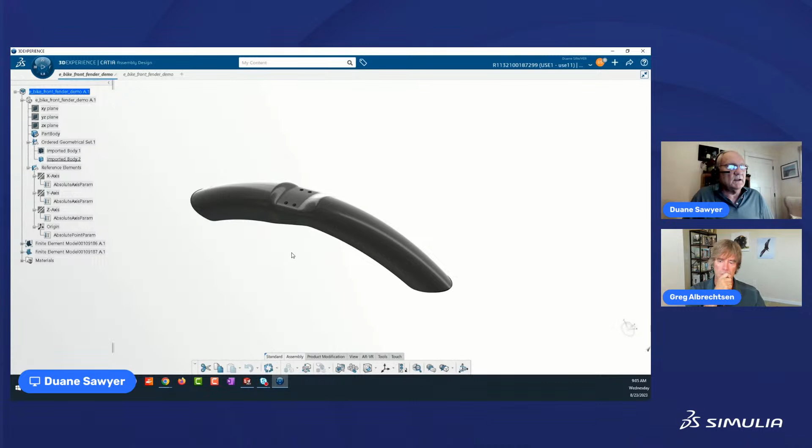From a plastic part design, you're looking for something that has uniform wall thickness, that's always a necessity. In the case of this part, the chances are very good that the plastic goes into the part into what we call a gate. So you probably want to place the gate in an area like this because it's going to be hidden, won't be shown. A gate is just the entry point for the plastic to go into the mold. So that's where you would shoot it in, essentially.

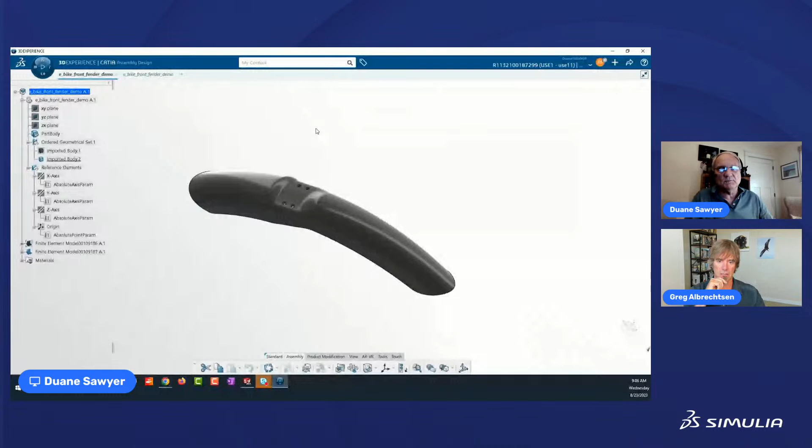Yeah, so it's called injection molding, and the plastic is melted and then injected into the mold. The mold itself is kind of the negative volume of what the part is, it's the absence of the part encased in a piece of steel. So that is the mold, and you inject the plastic into it, and then all sorts of things happen.

The advantage to having software do this for you is that in the past you would go by experience, or if it's the first time, you're in for a surprise. You put the plastic in there, and if it doesn't come out the way you expected, it could be for a number of reasons: the way it's processed, the amount of pressure behind the plastic stream going in, or when it cools down it warps because of the geometric construction, or it could just be the processing parameters.

So the software gives you the ability to predict what your end result is going to be. That's kind of our whole mantra - the whole mod-sim idea: simulate it before you have to build it. Reduce all that testing and prototyping - just do everything on the computer. You can do hundreds or thousands of iterations, and even if you don't get it exactly right in software, if you get it close, you go through a lot of the rudimentary things, and hopefully just build one mold at the end instead of several.

For a part like this, it's a relatively simple part. It's going to have a curved parting line on it, and some complexities in mold making. But if you were to make one cavity for this, I don't know what it might cost - it might cost $20,000 to $30,000, just for a single cavity. You could probably make it cheaper out of aluminum or something, but then it won't last as long.

If you are doing something pretty complex and multi-cavity - odd as it may seem, some of these small closures like on a water bottle - they make a very large cavitation mold, like 125 cavities, with a lot of parts in there, and you could easily spend over $1 million for a mold. So it really makes it important to know what you're doing before you invest all that money, because of the repair or modifications that might have to be done, especially for a multi-cavity mold.

So the process is typically you prototype it in a single cavity, and then you might go to a pre-production type of mold just to make sure you're thinking correctly. Once you've got everything lined out, then you go ahead with manufacturing the full production mold with multi-cavity. Well, let's see how we do this fender.

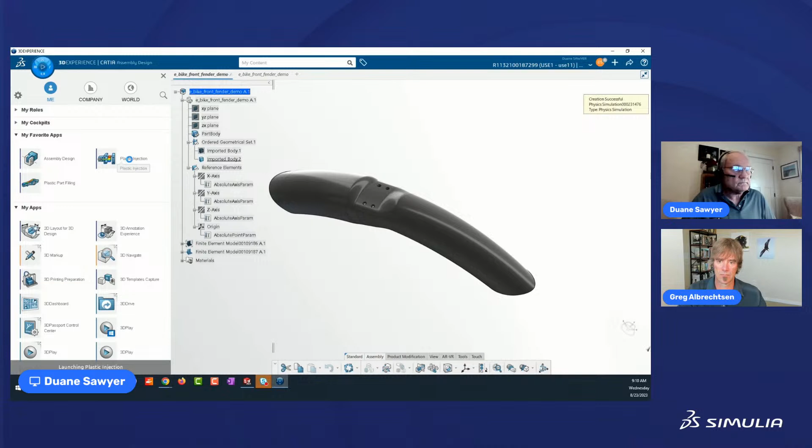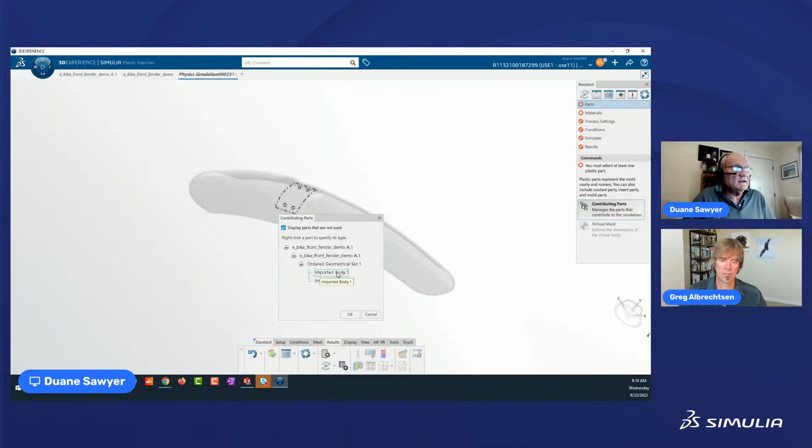The next thing we do is just go up to our compass and select the plastic injection molding app. This pops up with a window that allows you to step through the process. The first thing you see is the parts, and under this you've got contributing parts - there's only one in this case. But if you click on that, you end up with a tree, and we've got this part that we can say, okay, this is my plastic part. That's as hard as it gets right there.

If you've got multiple things you're considering, such as cooling lines and runner systems and that kind of stuff, it allows you to assign those domains to those different components.

And you see the green check mark over here. I had opened this up before, so I had a material in here from before. But if I were to go into here, it brings up a palette of materials that comes with the software, and then I get this little thing here. We'll close our eyes while you enter that.

So while you enter that in, you said the materials come with the software. So we get like a default handful of materials? If you call 4,000 a handful, yeah, that's two handfuls.

The material that we use, you just can't go make it up. It's characterized as being a non-Newtonian material, so you need to understand the reaction of pressure and temperature on the flow of the plastic. These materials we have here have all been characterized with that data, and it goes into a material file.

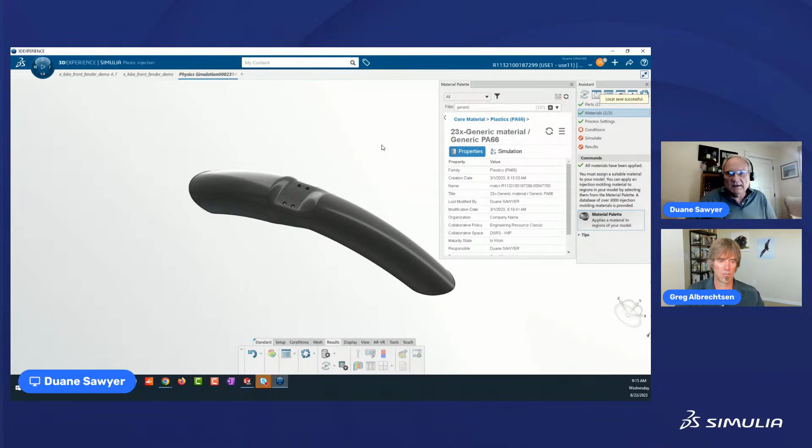You can have individual files that you could import as well, but this way everything's there, so you can choose whatever you want to do.

Notice the green check mark is there, so I'll go on to this next one, which also has a green check mark. That's just because I visited it before. But you see this area where they're in gray. These are the material properties that come in from the material I selected.

So it's giving me melt temperature, mold temperature, the ejection temperature - that's the prediction of the manufacturer saying this is the earliest temperature where you should or can eject a part from the mold, before it cools down to room temperature. Because in injection molding, cycle time is money - the faster, the better.

So they got to get something else in there - the faster you can make it, the more money you make. You may or may not have somebody sitting next to the machine operating it, but that machine costs millions of dollars.

So you break that down to what's the cost of the hourly rate, all the way down to the seconds, so you know how much that's costing you per second. So these can be edited, though it's typically not advisable unless you really want to do that and need to know how.

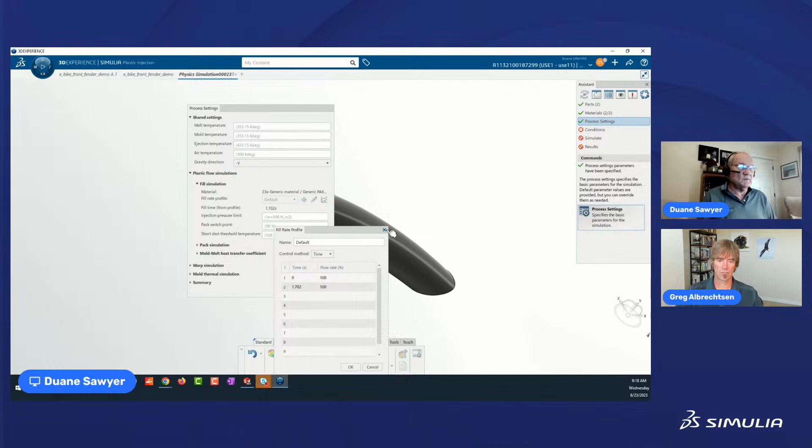So the next thing you look at - we're really kind of setting up a virtual machine here. We've got the mold sitting in a machine, and it's already calculated for you what the fill time should be. If you want to change some of those, you can set up a profile as to what happens when, what's the percentage of the flow rate, or by pressure. There's a number of things you can do, but again, you can just accept this as a default.

The switchover point from filling to packing is a default of 98%. Industry standards run anywhere from 90, 92, 94% up to 100%, but this is typically a well-accepted number, the 98%.

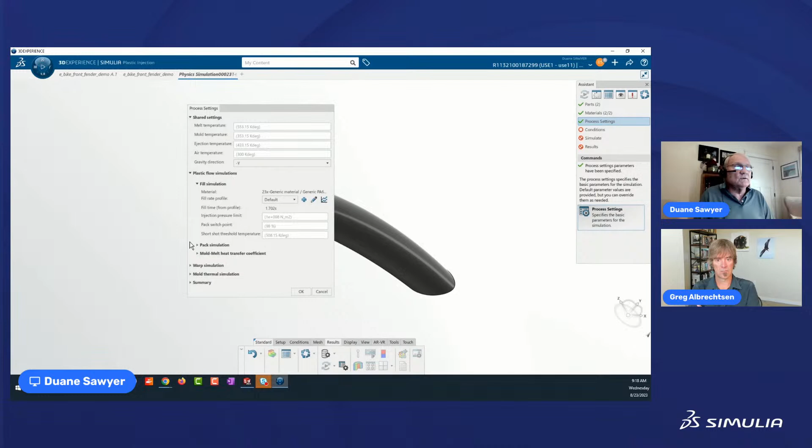So you can go in and change the packing profiles as well. This shows you how you can taper off your pressure depending on your settings, but again, these are preset for you, so if you want to, you can just accept all those and run them the way they are. We have some other things you can set.

Now, in this case, if you've got a runner system attached to this, and you've identified that the runner gets sheared off when the mold opens, it's part of your simulation, but you don't want it to be part of your warp, so you just eliminate that. So what's a runner?

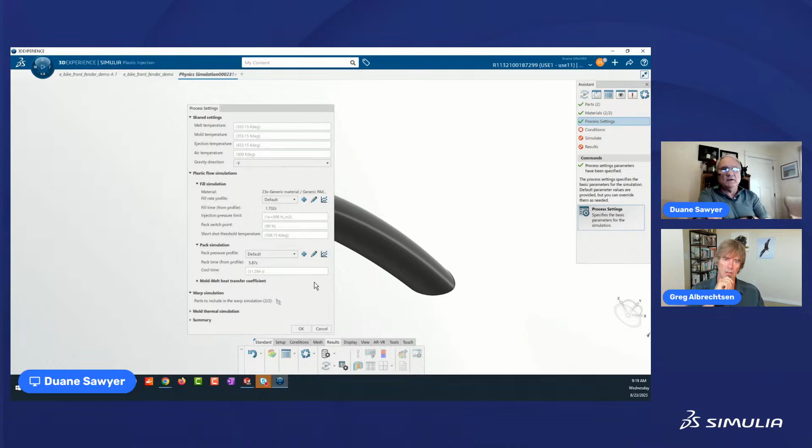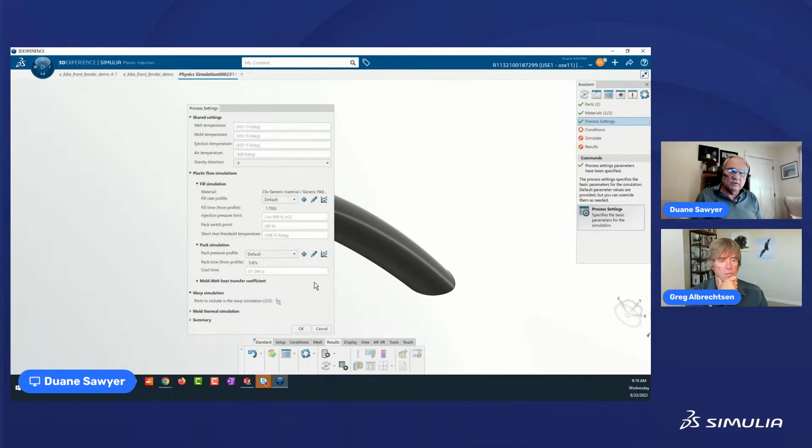A runner is the channel - think of a field you're going to irrigate. You don't have water there naturally, so you get a couple ways of getting water. One way is they dig channels and let the water flow through those channels and get to the plants where they need to be filled. So in this case, it's creating a channel by which the plastic flows through the mold to the cavity and fills the part.

As a kid, I used to build model airplanes. With those, I'd have all those little parts that had to break off the branch - that was the runner system. And it was interesting because that's the thing you try to avoid. In most cases, you want to minimize the amount of runner system, especially in today's economy - you don't want to throw that away or regrind it. That was more material than the part itself sometimes, when I was a kid. I didn't know what to do with it either, so yeah, throwing it away is what we did.

But that's all recyclable - it's thermoplastic material, so it can be remelted and reused. Plastic generally, as a rule of thumb, can handle about 25% regrind without doing a huge lot of damage to the physical properties. So minimizing a runner system will help you minimize the amount of regrind you have, because in today's world, those runner systems you produce would immediately be put into a grinder, chopped up into little bits, mixed back into the pellets, and remelted.

So in this case, we just click OK. Now the conditions we're setting up here, we only have one, and it's an injection molding condition. Because these are show surfaces, you're not likely to want to have a gate there.

Now, the importance of that is that when you have a gate, the plastic inside that gate is still pretty warm. So sometimes when your mold opens up and separates your runner system from the part, it'll create a little string of plastic. That's something you don't want to see, especially if it's a controller or something you'll have your hands on—you don't want to feel that little piece left over from the molding process.

That's like if you have two gates and they shoot into the same place. No, that's a knit line. I'm just talking about the vestige of the gate.

It's kind of like if you take a candy kiss—the shape of them, with that little nubby thing. You get the little point at the top, and that's where it shut off the flow, and that's what's formed. So in this case, you end up with a little sharp, spiky thing that comes out of the gate.

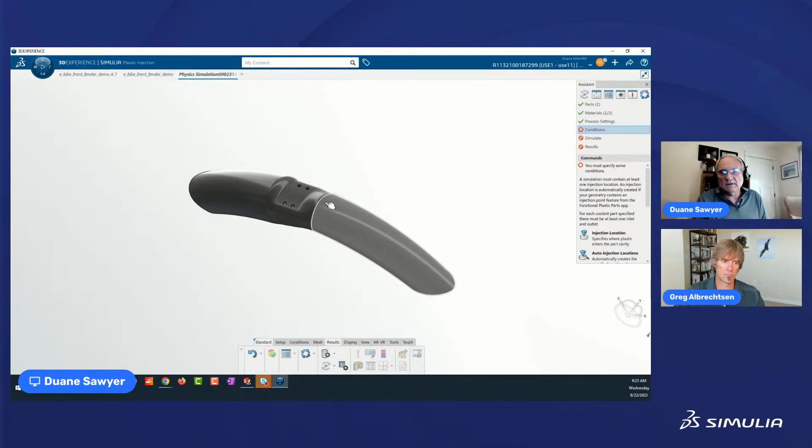So you try to manage where that goes. Ideally, for a part like this, you'd place it in the very center of the part, which would be right in here somewhere. But that might show, so you wouldn't want to do that. This is the attachment point where it's going to go onto the bike.

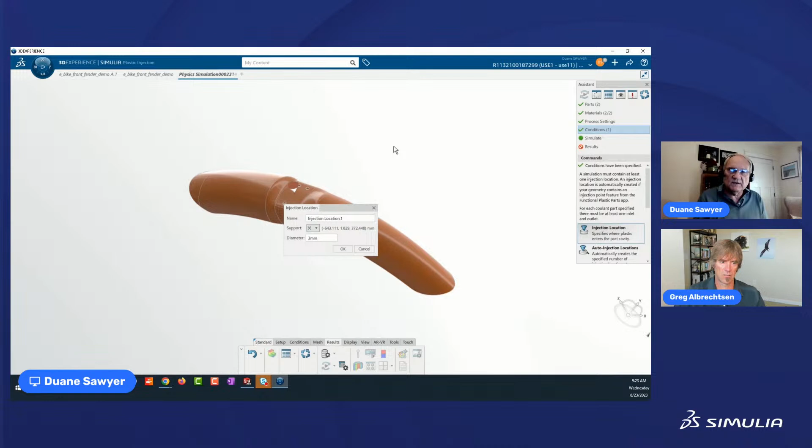So you click on there, here's my gate icon, and it comes up saying the default is 3 millimeters. That might be a little large for this part, but again, you can accept the defaults and get a result just from them. If you want to change that to a 1 millimeter gate, you can. Or if you've got an edge gate or side gate, you can change this condition to accept a face, and that cross-sectional area of that feature will be represented here as your gate.

And that's basically controlling the size of the diameter of where the plastic is being injected in, right? So a bigger one's going to shoot more in at once, and a smaller one's going to get less. Right, absolutely.

Yep, just a quick thing.

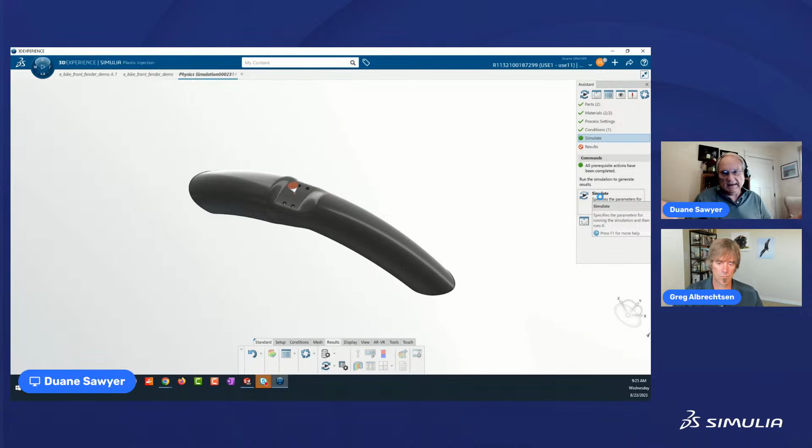It is, yeah. So now we've added all the things we need for this particular one. We're going to go into simulation. I could do the mold cooling analysis if I had cooling channels, but since I don't, that's grayed out.

So if I didn't want to do these two, and just wanted to check if I can fill it really quick, that's all I need. But for this one, I'm just going to run it. We can run as many as 8 cores, which is included in the software, so you don't have to pay extra for those.

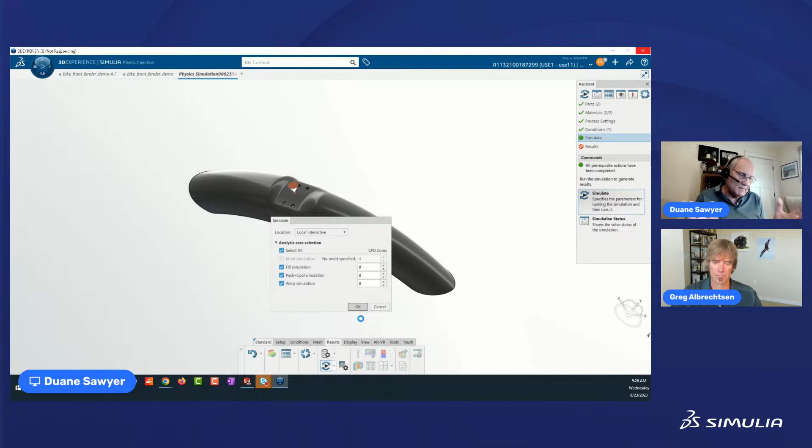I'm just going to click on this, and what's happening behind the scenes is actually creating a mesh, so you don't have to worry about the mesh. If your model is clean and doesn't have any gaps, it should create a mesh very, very easily.

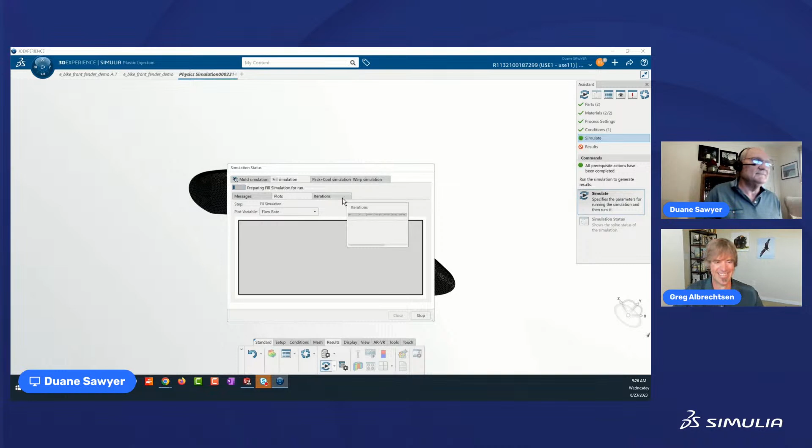And so now we're off and running—we are actually running the simulation. Here we can see as it's running, there's a number of plots. If there are some error messages along the way, they'll show up. You're living on the edge running this live, man. Oh yeah, I know. But it doesn't take terribly long.

So as it runs, you can see the flow rate as it's filling the cavity. We're partway through, but we can jump to the results—I have those done.

So what we're going to see—I'll probably have to stop this. Let me stop this and go over here.

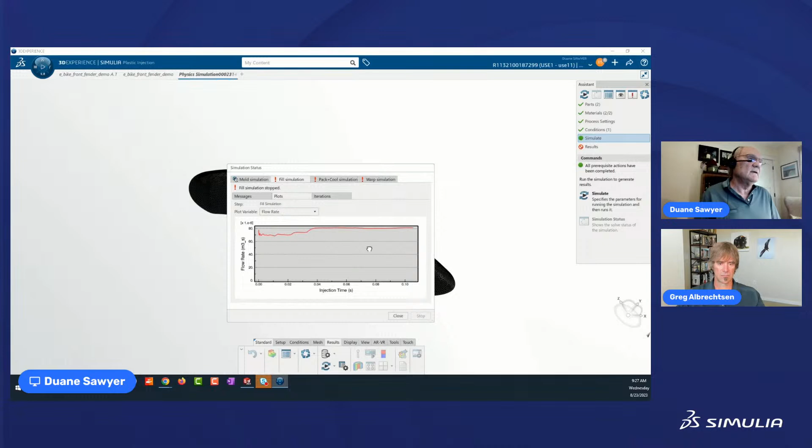This is the Julia Child's moment where you pull the finished cake out of the oven. Exactly, right—so here's the finished cake. Looks delicious. It is.

So you've got the pull-down tab for each of the runs you have. You've got the fill simulation, the pack and cool simulation, and the warp simulation. The first one you want to look at is the fill, because really the first thing you want to understand is: can I actually fill this thing?

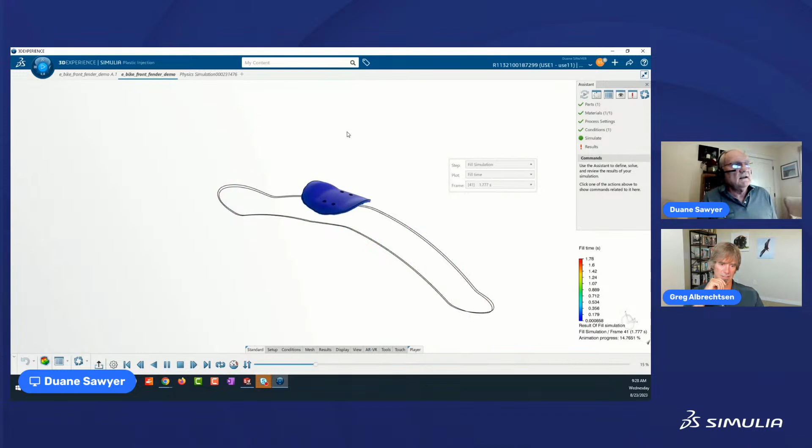I can click this button up here and it will do the animation automatically. That's cool. Remember I said that ideally the gate should be here somewhere—so now what you're getting is this part being filled last. In this case it's probably not a huge deal, but you're probably going to get a little more warpage in this area.

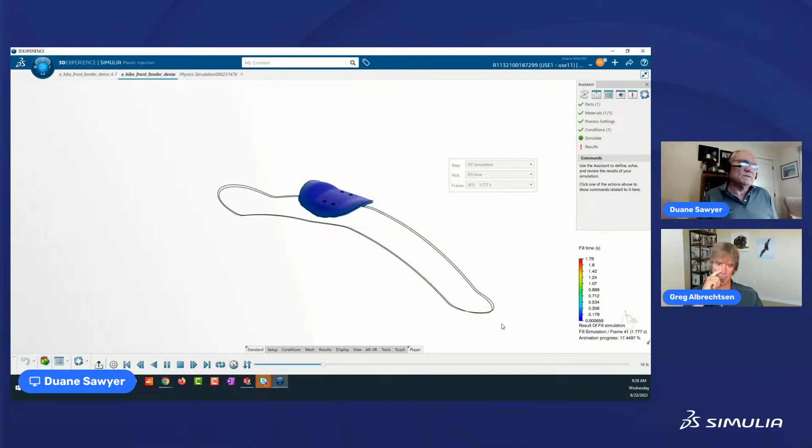But that's why we do simulation. Sometimes what you want to do, you really shouldn't do, and the things you shouldn't do, you really want to do—it's kind of one of those things.

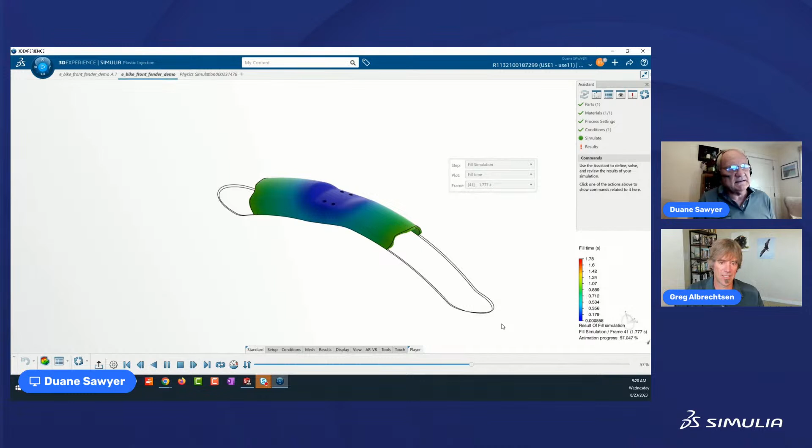I guess you could probably move the gates underneath, since nobody would see them there, right? Yep, that's true. In this case you have to think about the mold design too, because putting the gates on the other side will make the mold more expensive.

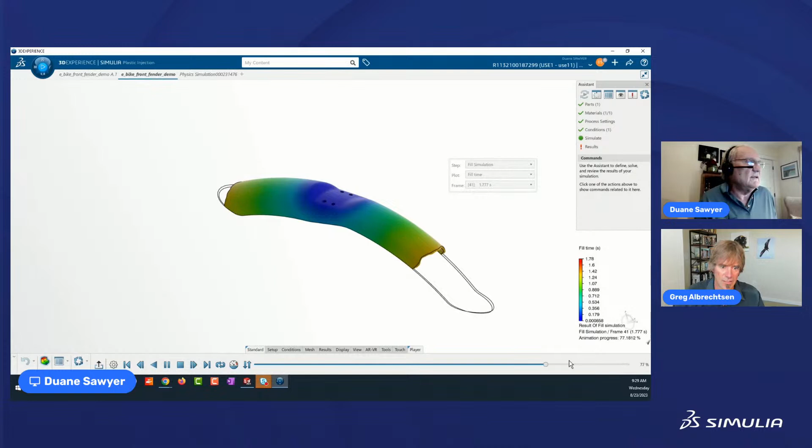So when I'm watching this down there at the very bottom right, it doesn't look like it fills. Am I seeing that it's actually not filling, or is it just so fast I'm missing it? Yeah, I think that's what it is—it's just a visual thing. Oh, I saw it there.

Okay, so if I stop this, I can slide this over here. Oh yeah, nice—so there's a plot for that. We can go in here and look at... let me get down here to it. Come on. Maybe I need to get this thing here.

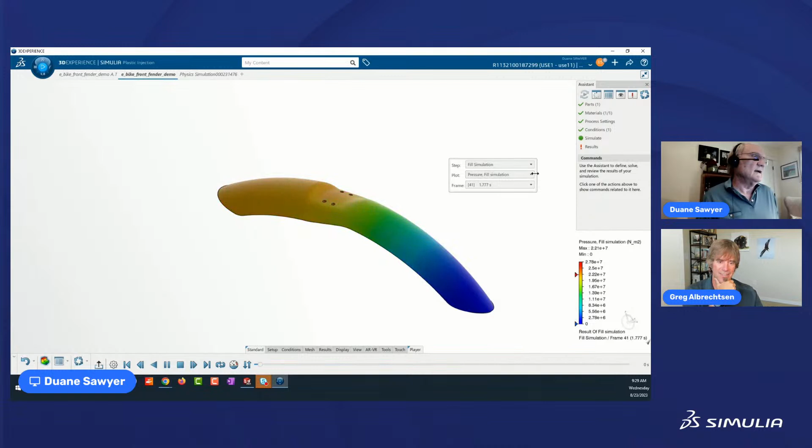Oh, because it was still animating—I was still trying to animate it. We're in a stop state now. So there's a couple things in here: you can look at air traps, and air traps are... I'm still animating, why is it doing that? I think you're up there in the compass. Just need to click on it. Yeah, you're right, you're right.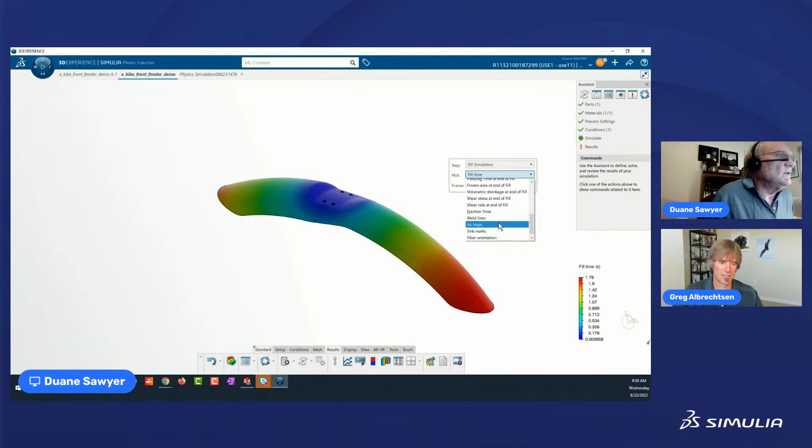So you can look at ease of fill. Now this one comes up all green. Again, you don't have to be a rocket scientist to figure this out: green says go, yellow is cautionary, and red means don't do that.

Had there been a non-fill down here, you would have gotten red. That also tells you you've got some stuff on a razor edge—so if you get yellows and maybe even some reds, even though it shows it fills, variations in your molding process may cause short shots. To solve that you might need to bump up the injection pressure, change the wall thickness, or change something in the flow path to make it flow easier. So there are those kinds of very helpful things you can learn.

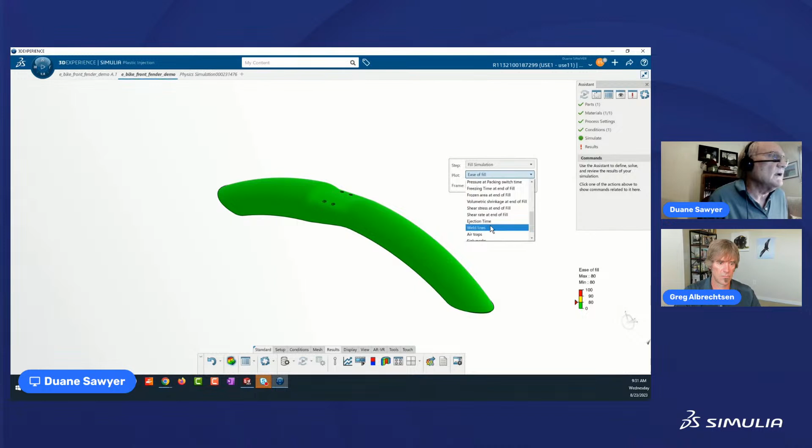You've got weld lines, which are hard to see in this particular one, because weld lines are where you get two melt fronts coming together—we're seeing them right here, and they're not very big. Had those holes been larger, the weld line would have been greater, and if they'd been rectangular or square, they would have been even bigger.

But the flow goes around here, and what you're looking at is degrees, ranging from roughly 0 to 100, 120, 130. So if you imagine the melt front going around this hole, this line right here, which is the front of the melt coming this way, would be represented by 180. It's a straight line.

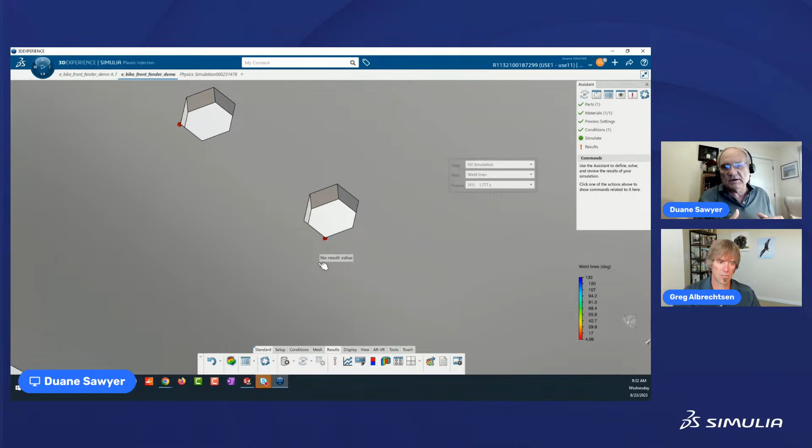As soon as it starts wrapping around here, you get this V-shaped flow. It's that angle of inclination, I call it, between the two faces, where you understand the severity of the weld line. If you're at 0, that's a head-on collision, if you will—that's your most severe weld line. Part of that is because the molecular chains in the plastic don't combine, they just bump up against each other. As that angle increases, they start commingling. The two flows are commingling, and then it becomes one flow again. So going straight on is the worst case.

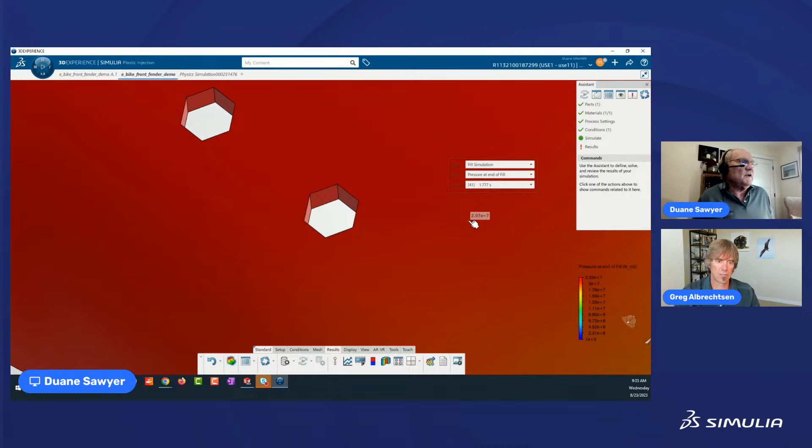So you've got pressure at the end of fill, and remember this is the lowest pressure, and this was the last to fill. So let's jump over here to the warp simulation.

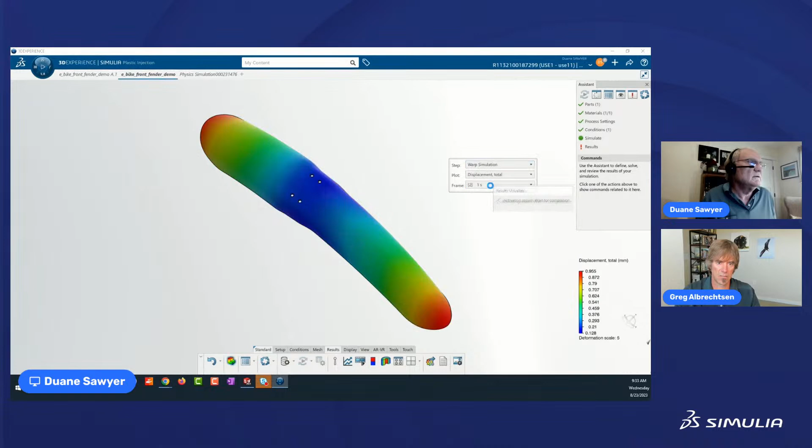So we see in the warp simulation, basically we got higher displacement at both ends, and there's even more here than over here, which was borne out by the pressure at the end of fill, and that kind of thing.

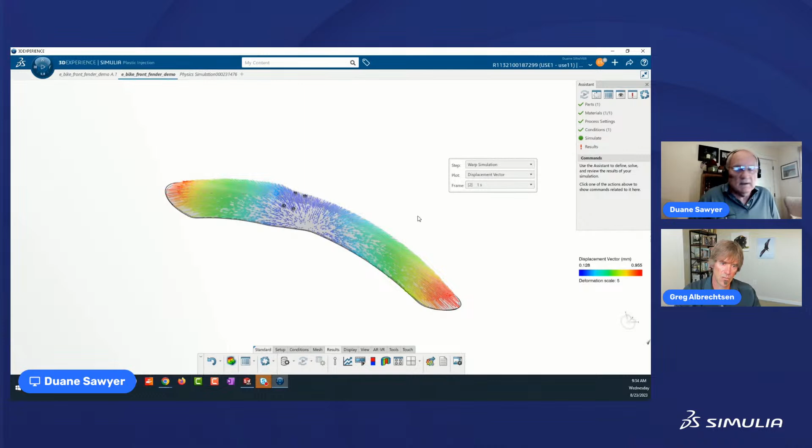Right now I have this set up as displacement total. We have displacement vectors, and we show those now. This is showing you the movement direction of the plastic as it cools. These are the parts that you can export to a structural app or whatever—you can actually get a deformed shape from this information.

You can then take that into some of the tools we have on the CAD side, CATIA in particular, the VSO—virtual shape optimization. We can say, okay, here's this deformation vector, this is our original geometry, now morph this to look like the warp geometry.

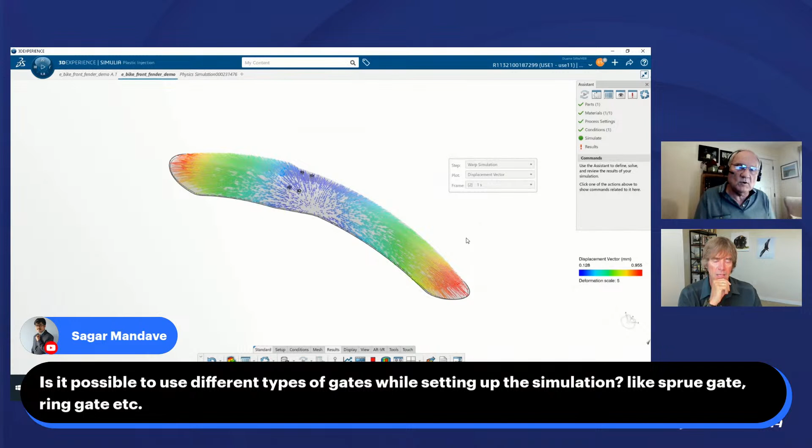Yeah, I've done that with simulation before, like sheet metal or composite simulations, and then I can take that displacement file. This is the same thing—it's a displacement file, and you bring that into CATIA, and using one of the shape morphing tools, you apply this displacement file to the B-rep or to the geometry, and it morphs the geometry.

So then you can go through this whole iteration of knowing what your final part looks like, and then, like with springback, you go through that loop. So sometimes when you design in the software, you don't necessarily want to design what your finished part looks like—you have to design what your mold part looks like, so that when it comes out, it is what you hope it is.

You naturally do that with shrinkage, and you kind of guess what your shrinkage is going to be. With different materials, they're going to shrink at a different rate. So what you'd do the old way is just take a global factor percentage and scale everything up and say that's my mold geometry, and hope you guessed right. So when it cools down, it cools back to the as-designed shape.

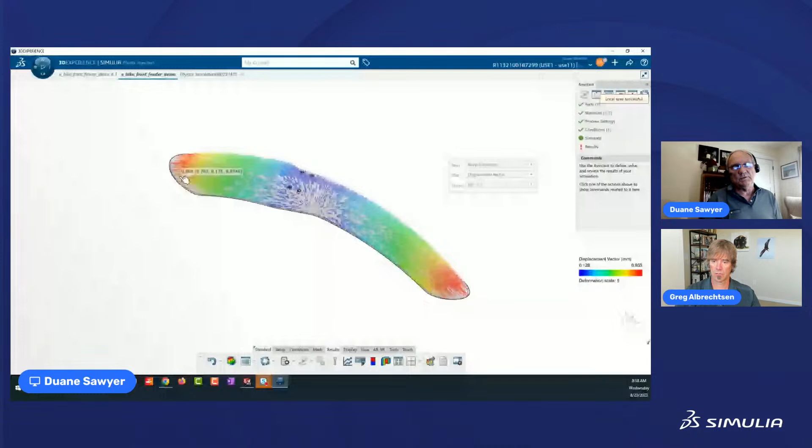This software is going to basically tell you the simulation of that injection molding process, as though you had built a mold, put it in an injection molding machine, ran some parts, and now you've got them. So it saves a lot of time and money. And the earlier you do this, the better off you are.

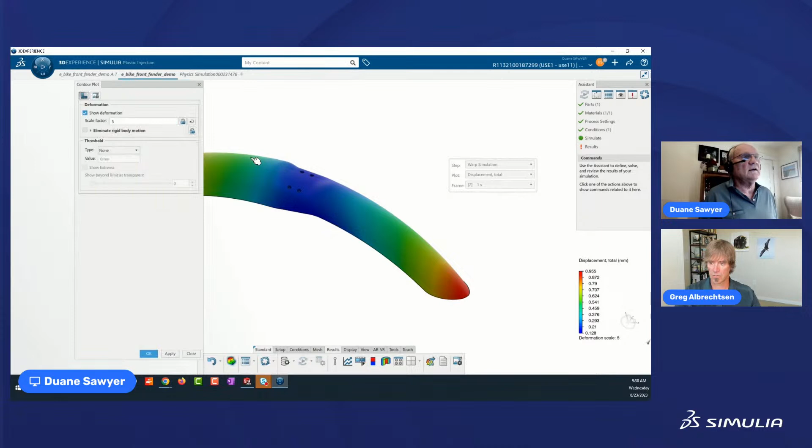So this is displacement. You can, if you really want to get kind of crazy, exaggerate it so you can see what's actually happening in your part in terms of warpage.

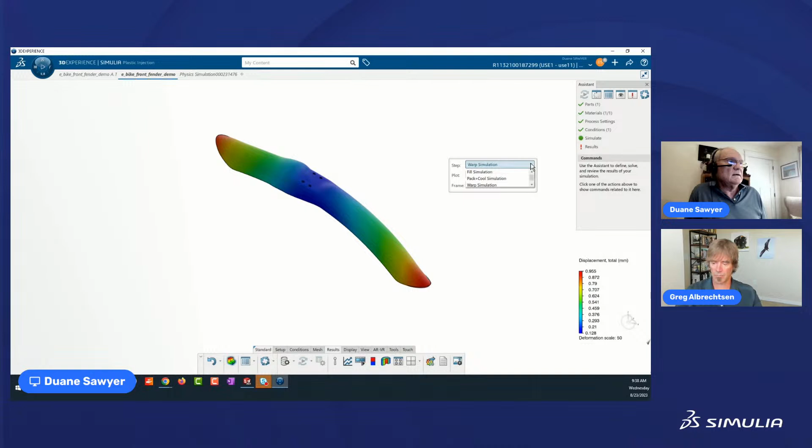But typically the real thing is you want a one-to-one relationship with that, and that's all adjustable. So that's like a magnification or amplitude and display factor. If you've got some slight changes, it helps you identify where those are.

So here's the packing - most of the heat's been taken out, but your heat still resides here. You can check your temperatures just by hovering over a spot, and it'll give you that information.

Why would I care about my temperatures in injection molding? Well, a while ago I mentioned the ejection temperature, and I also mentioned that cycle time is important.

So the kind of old school way of thinking is that I've got a dimension of a part that I've got to maintain. And so you get some guy who's been a molder for 40 years, says 'I know what I'm doing,' and what he does is he parks it in the mold longer. So that mold becomes a cooling fixture that freezes that shape into your part.

So it comes out, he measures it and says 'See, I did it.' Well, the problem is if you've got a part of an assembly that goes into, say, an automotive thing...

and you're molding this thing in a northern part of the country where it's cooler, but your assemblies are being done in Mexico. So you ship it down there, and some guy's driving a truck, and he stops in Tucson or whatever and spends the weekend there, and inside this truck it's really hot, so it becomes like an annealing oven.

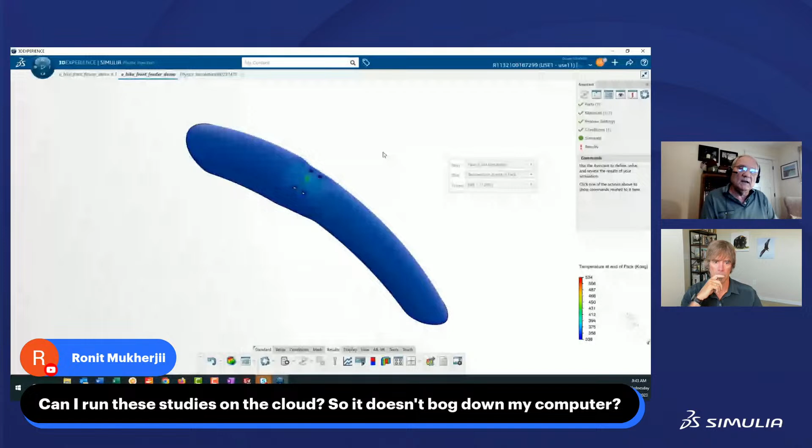Can we do these studies on the cloud? Absolutely. These can be done both on premise or on the cloud. And then you can run some DOE studies if you want to look for the optimal settings. You can even do DOE studies on the geometry itself, like rib placements or gate locations, to try to minimize your warp, whatever it might be. You can configure some studies to help you with that. Those take some time, but they're so helpful.

You mentioned DOEs. That's one thing we haven't talked about in any of the previous sessions. We have a product called Part Design Simulation, or parametric design study, that allows us to do designs of experiments where, from a structural standpoint, we can modify dimensions or material characteristics and have it propose what those particular solutions are, and then you can do a study.

So you're saying that within the injection molding utilities, we can do DOEs here as well? It's not inside the software—you'd have to use other pieces of software, like PDS, to do that. But you could change your gate locations and things like that. Speaking of gates...

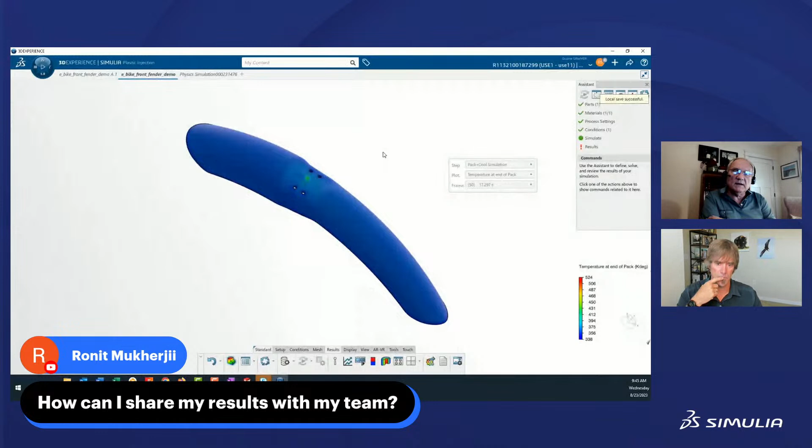I just saw a question come up about sharing the results. There are a number of ways to do that. There's a report you can put out as either a PowerPoint or a Word document. I don't find those extremely useful because you don't see the 3D representation, but you can create a 3D file that can be shared with other people. They can mark it up—they can say, I noticed the fill doesn't do very well in this area, or it slows down here, and draw a circle around it and ask what we can do to change it.

So there are a number of ways of sharing that data. I assume this is all stored in the same tenant, so anybody with access can open this up and visualize it as well. You mentioned 3D Play—that's one of those cloud or internet-based utilities where you don't even have to launch the software; you can just come in and take a look at the results. But if you're sharing it with a tool maker or someone else, you can export that to a file to share.

Speaking of performance, we're running up against the end of the presentation, but we've got a few questions here that we do want to try to get answered.

What about a structural simulation? So now you've gone through the molding process—can I do a structural simulation, like a force loading of this plastic part now? Yes, you can. There are a couple of products we have on the platform, structural tools that will import the data directly from IME, the injection molding engineer software, without going through a third-party translator. So you're able to bring that directly into the structural app and just apply your loads however you want.

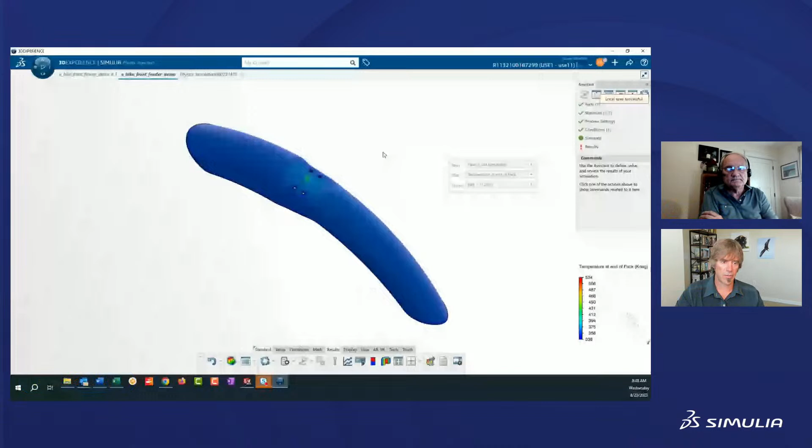So we do have another question here—might be a tough one—but can you highlight the main difference?

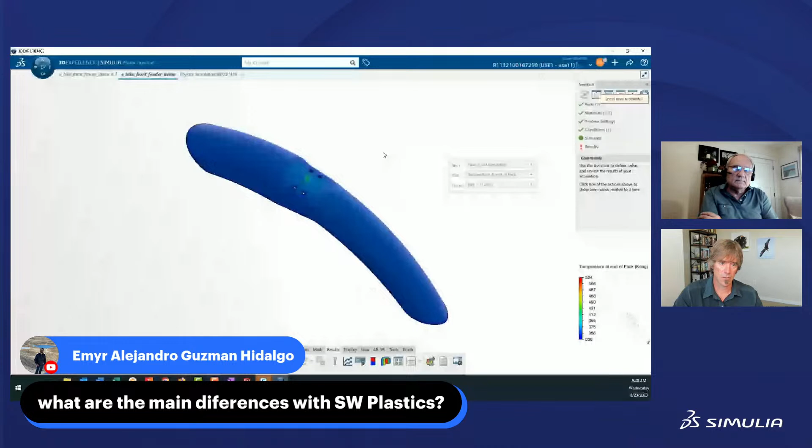Why would I want to use the IME, the injection molding here on the platform, versus something in SolidWorks Plastics? There aren't any real differences, actually. The solver in SolidWorks Plastics is the same solver we have in the injection molding package on the platform. The difference is in how it's executed. There are a couple things SolidWorks Plastics currently has that we don't have on the platform, and some of that is capability for a niche market, like birefringence.

Unless you're making lenses, you don't really even know what birefringence is, but SolidWorks Plastics can do that. There are some other capabilities we now have on the platform version of the simulation. But basically they are the same, and the results are very comparable. You compare one against the other and can hardly see the difference. Some of that has to do with there being a different meshing technology on the platform versus SolidWorks Plastics.

But I think the big key thing is the ability to go into other platform applications, like structural. If you're molding a conduit for an air conditioning duct, you can go into a flow calculation using some of the results. So you have available to you more simulation tools than you probably do with SOLIDWORKS.

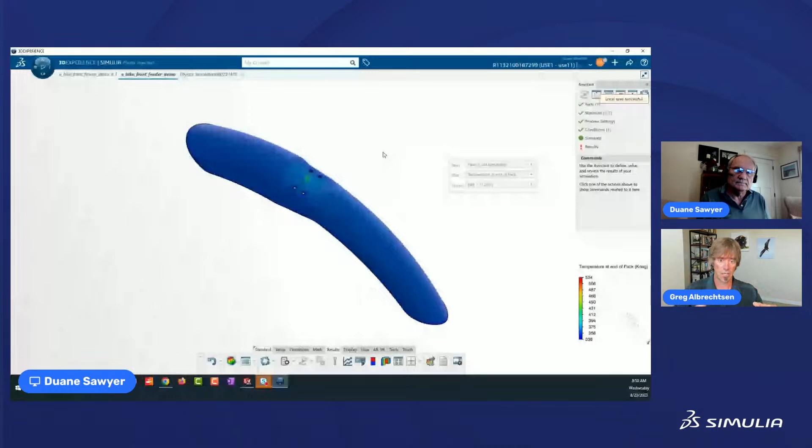And your mention of the cloud earlier, to me, I think that's a major advantage for us, to be able to compute on the cloud. If you don't understand what compute on the cloud means, that means you're not computing on your desktop, you're leveraging our cloud installation to do your compute. So now you don't have to have a really high-end computer, and this works for all of our simulation applications. You can run these high-end simulations without needing that computer power.

I also got a quick note from one of the experts that our warpage calculation seems more accurate in the 3DEXPERIENCE software as well. I imagine that's probably just because of the general capabilities of simulation on the platform, including all of our Abaqus technology, which is more accurate for nonlinear behavior. And the meshing tools are important there too.

Well, hey, I just want to thank everybody, most importantly I want to thank you, Duane. Thanks for your time, thanks for this awesome presentation. I really didn't know anything about injection molding, but I feel pretty good that I could go in there and make some really great predictions. It looks so simple. I can make predictions, we'll see if my assumptions are correct.

Garbage in equals garbage out, right?